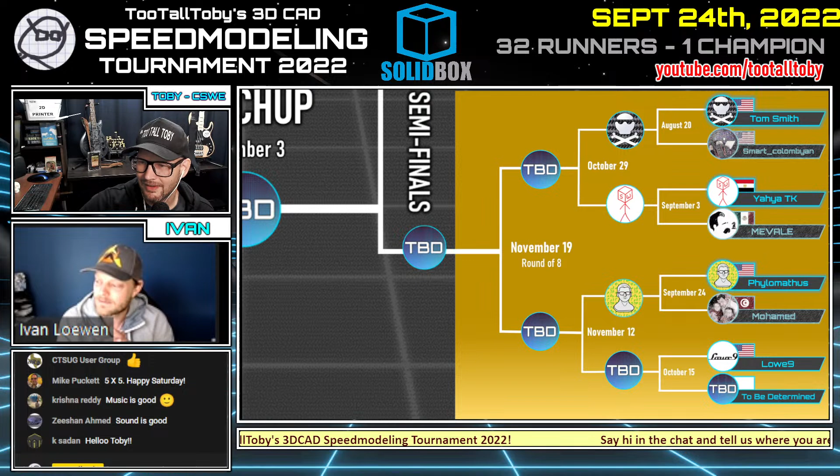So I like the bracket that you've done. Sorry to interrupt. Oh no, thank you. I like it. Yeah, it's a lot of fun to follow, and it's a good thing. I'm looking forward to seeing who I'm up against next. Yeah, this TBD guy is really running the board here, it seems like. Oh yeah, watch out for him. I guess we're going to find out next week, right?

We're going to have Jay A from the United States, looks like it's got some kind of a panther for a logo there, going up against Anti-Venom, a regular in the chat. Going to be finding out who emerges victorious, and then that person's going to go against you on November 12th. So that's going to be interesting.

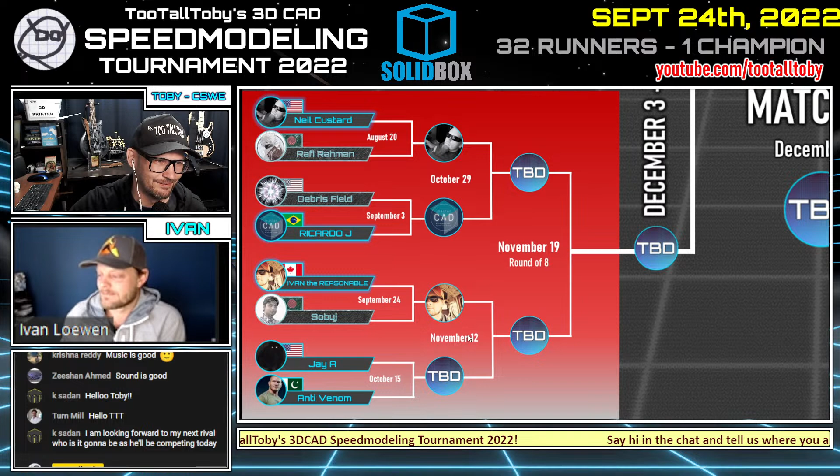Today we're going to see a special matchup where we've got Fusion 360 user Aaron from the United States going up against Gerben from the Netherlands. Gerben's an Inventor user. This actually happened a few episodes ago where we had Fusion 360 versus Inventor, and Fusion 360 emerged victorious. I believe that was Kachoo.

So now we're going to get to see another matchup of Fusion 360 versus Inventor. These matchups are done by one of my producers, and they're pretty random. So I think it's interesting, the synchronicity of having again some Autodesk on Autodesk action. It's going to be pretty cool.

And k sadan confirming in the chat, yes, it was Kachoo who made it through there, the F360 user.

We're also going to see some SolidWorks versus SolidWorks action today, with Zeeshan from Pakistan going up against WALRUS GUMBOOT from the United States. I think WALRUS GUMBOOT and Kachoo, between the two of them, should have a side competition for my favorite username in the tournament. It would definitely be neck and neck between those two. Yeah, absolutely, I concur.

And of course, Ivan the Reasonable. And then we've got Chris Smith in the chat saying, yo, what's up, Chris Smith? He was my co-commentator a few weeks ago as well while you were running.

So we had 32 runners from around the world that have signed up for the competition. We have 10 additional runners on the waiting list in case somebody's not able to make it or pulls out at the last minute, or maybe gets afraid of who they're going up against and gets sick because they're afraid of their competition. So we have 32 runners plus 10 on the waiting list.

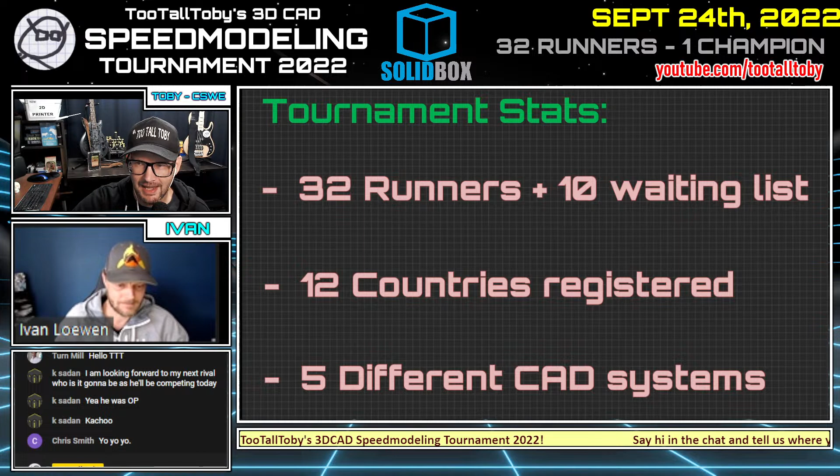We have 12 different countries that have registered for this tournament, and we have 5 different CAD systems so far, and who knows if we'll see any additional CAD systems as time goes on and we get deeper into the waiting list. So today we're going to see Aaron going against Gerben, and we're going to see WALRUS GUMBOOT going against Zeeshan.

And then next week, like we mentioned, we're going to see Jay A going against Anti-Venom, and Lowe9, good old Andrew Lowe, one of my mentors in the world of surfacing. I learned much of what I know about surfacing from Andrew and from his amazing presentations. So I'm excited to see him in action.

Going up against TBD, to be determined. I think it's going to be Zach Ass. So if you're watching out there, Zach, I think it's going to be you. We're just getting some of the logistics together. We've been on the road a lot this month, these past 3 weeks, so we're just getting some of the final confirmations together. But I think it's going to be Lowe against Zach Ass, which is another cool username.

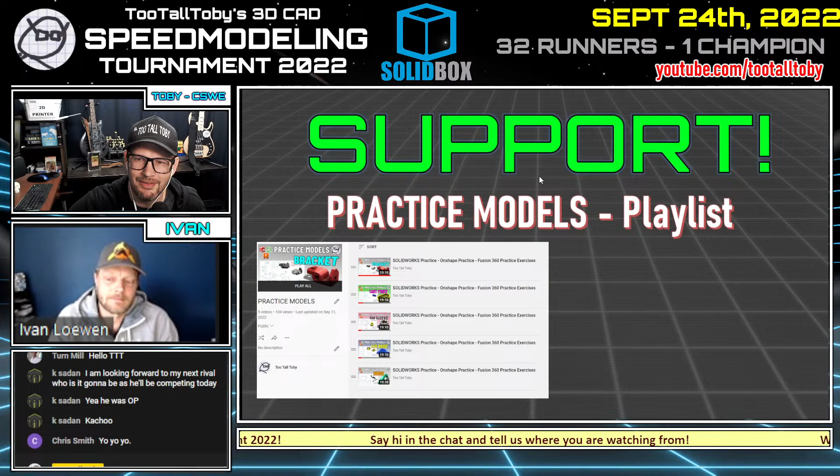Is that a foreshadow of future rounds, maybe? No, actually, it's a little bit of foreshadowing as far as complexity goes. The models themselves actually come from older episodes of Model Monday Live, where when I look back through those older models, I'm like, man, I really challenged you guys. I gave you some tough ones. Yeah, I recognize some of them. Some of those take quite a bit of time to get through to figure out what's really going on with the model.

All right, so let's talk about how this works. The way it works is that I'm going to show our competitors a 2D print, and I'm going to have them turn it into a 3D model. They're going to calculate the mass and enter that mass in the YouTube chat. So check out the YouTube chat, and we will see who is able to answer it first.

Now, the rules of this tournament are that it's going to be a best-of-3 matchup. So our runners are going to be side by side. They're going to have a little win indicator in the upper left or upper right, and once they win one match, they'll get a little green dot indicating they've won. If they win 2 matches, then they move on to the round of 16. You're allowed to get one wrong answer.

So our competitors can go into the chat, type in an incorrect answer, and I will say, I'm sorry, Tom Smith, that's incorrect. What you're going to need to do is look at your model, look at the print, and see if you missed anything. Then Tom Smith could go through and try again. If he gets it right the second time, then he's good. If he gets it wrong the second time, then it's basically up to the other person to lose. So you get one more try.

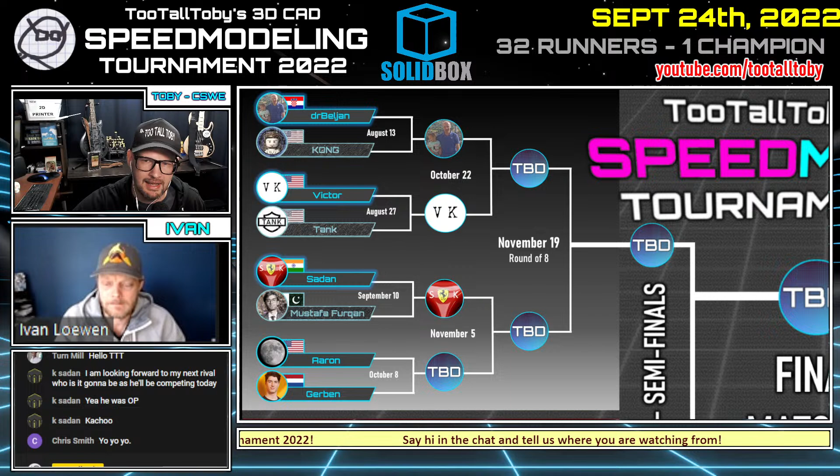I'm excited. This is the end of our round of 32 for the black bracket. So you can see here, we go down to our date today, October 8th. We got Aaron versus Gerben. This is it, this is the bottom of the black bracket. And after this, we're going to have our competitors for the round of 16 out of the black bracket.

So let's learn a little bit about our competitors here. We can see that Aaron is using Fusion 360. He's a twin, and he's still in school. And he once made a Roomba-esque robot with minimal parts. That's kind of cool, huh?

Very nice. And then we can see here that Gerben is the TooTallToby speed modeling champion from 2021.

Quite the flex there. And we see that Gerben also won first place World Skills Netherlands CAD 2020. So this guy is a speed modeling slash CAD modeling competitive professional. He's really in it for the competitions.

So this is going to be a good matchup. We're going to get a chance to see a little Fusion 360. I know a lot of people who watch this channel are more into SolidWorks, and so they're going to get a chance to see a new CAD system, or possibly two new CAD systems. I'm excited for this matchup.

So here's how it's going to go. In just a moment, I'm going to give you guys a full screen view. I'm going to give you a countdown, 3, 2, 1, and when I do, I'm going to show you the 2D print. And when I show you that print, it's going to be up to you guys to immediately start creating the model. Just give me a second, make sure I got everything in line.

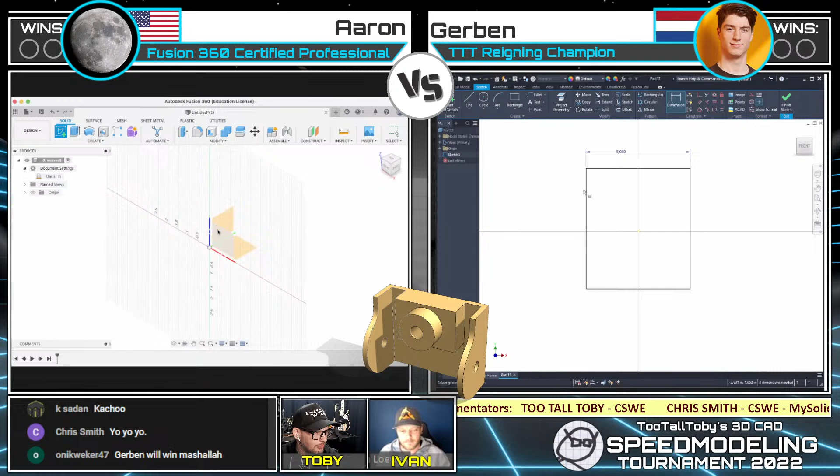Both of our competitors are already going, so I'm going to flip over to their screens so that we can see them modeling this. We've got Aaron on the left, Fusion 360 certified, Fusion 360 professional. We got Gerben on the right, reigning TTT champion.

And we can see that it looks like Gerben is starting off with kind of like the base plate type of a view here, where Aaron is starting off more with that U-shaped view. So let's see who is able to come out victorious in this thing.

We see Gerben going through, adding in his dimensions, fully defining that sketch. Dimensioning out to that point of tangency. Wow, very fast to create that side view.

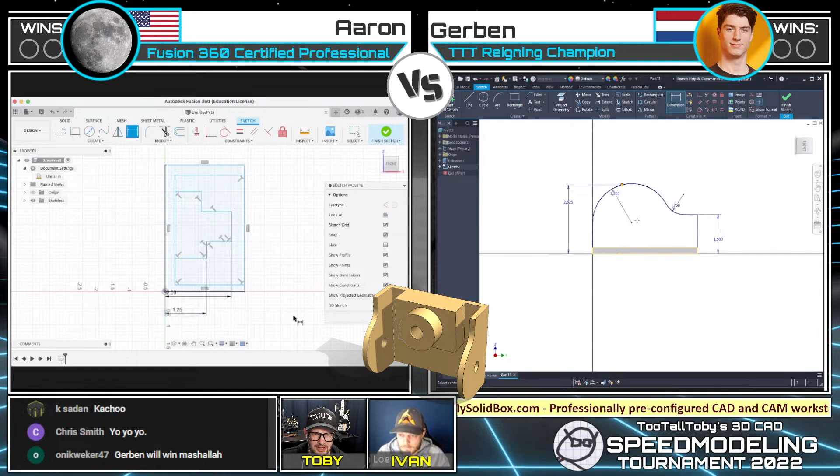That's using Inventor, standalone desktop software, where Fusion 360 users are working from more of a cloud-based format. And we see on the left there, Aaron looks like he got an error off of his sketch, and it looks like he was able to resolve that.

Looks like Gerben's going through, made a mirror of that plate on one side of his model. Was able to mirror that over pretty quickly.

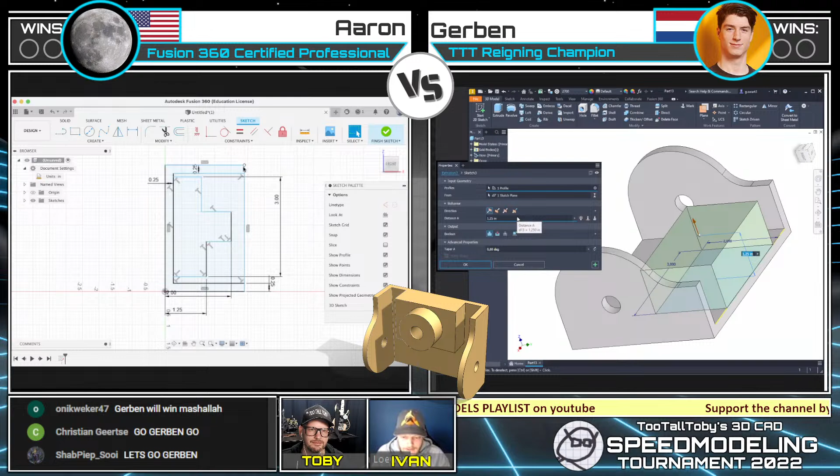Yeah, these guys are fast, and it's interesting seeing something other than SolidWorks, a few little symbols and toolbars that you're not familiar with, but the 3D model is happening regardless, and it looks like Aaron's doing contours and multiple shapes in one sketch. So there's something I'm familiar with as well.

Yeah, we saw Kachu utilize that strategy as well, and it really paid off nicely for him. And we see Gerben, man, just flying through this model.

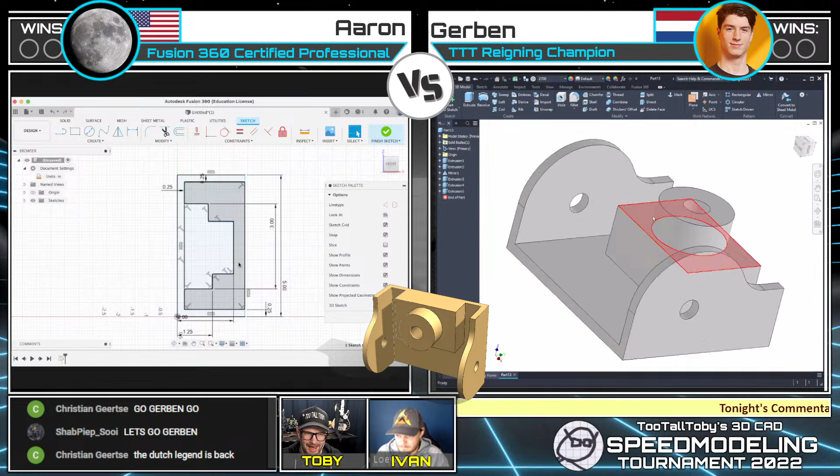I see in the chat we got some people cheering for him. Gerben, go, Gerben, go. We got people saying, let's go, Gerben. So, and he's really moving through this model quickly.

And he is. And, you know, I think that's what we would expect from the reigning TTT champion, but I didn't quite expect him to move through that quick. I mean, wow, this is impressive for sure. Yeah, no question. Yeah.

So it looks like Gerben has come in with an answer, and looks like he's come in. I'm just trying to double check the answer that I'm seeing there. One point. Hold on, stand by one second, Gerben.

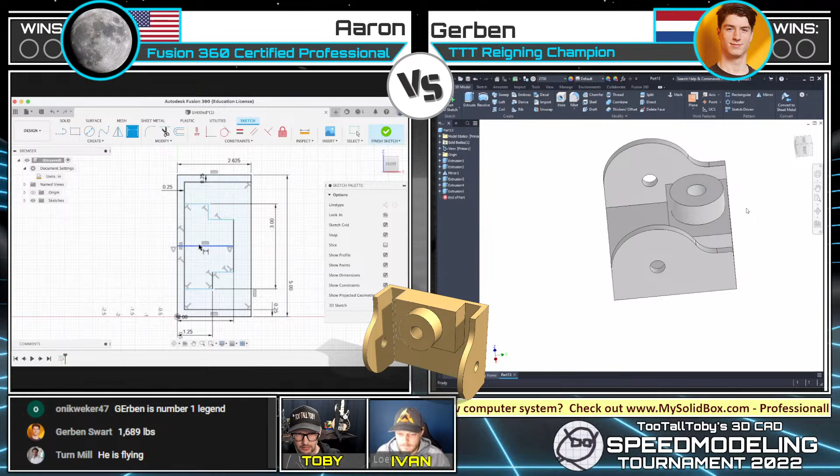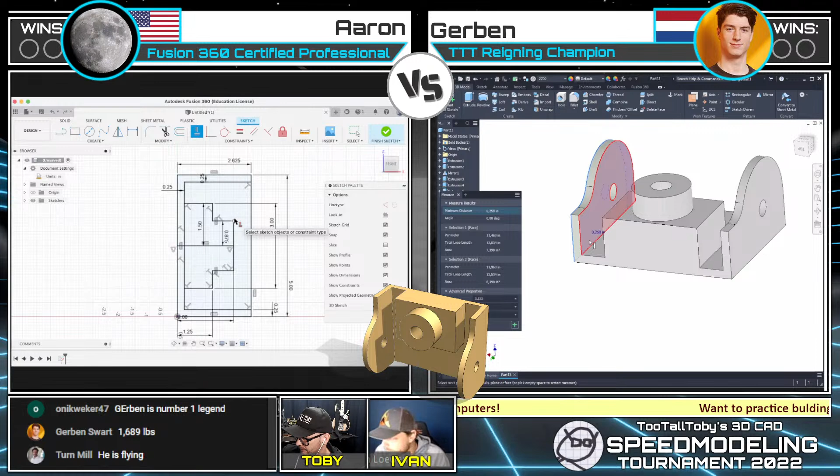Gerben came in with 1.689 pounds, and that is not correct. It looks like Gerben might have either a missing dimension, incorrect dimension, or possibly a material property issue. I didn't actually notice, he was moving so fast I couldn't see what was going on. But something is off with his mass properties or the resultant weight. We're going to let him try to figure it out.

Yeah, I've got an idea of what it is, but I'll let him figure it out. Okay, good. All right, well I'm glad that you're confirming. I always worry in these things that maybe I've done something wrong on the admin side.

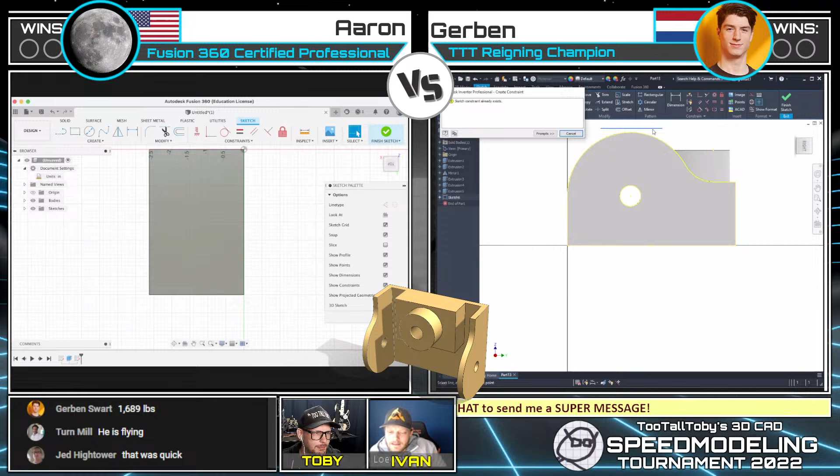Thank you for putting my mind at ease a little bit there, Ivan. No worries. So we can see on the left, this opens up the door for Aaron to go through and continue with his strategy of creating the contours in his model.

We see Turnmill in the chat say he is flying, and Jed Hightower say that was quick, that was very fast. You know what I'm going to do after the stream is over? I'm going to replay it and try to model this part as well, just to see how I stack up.

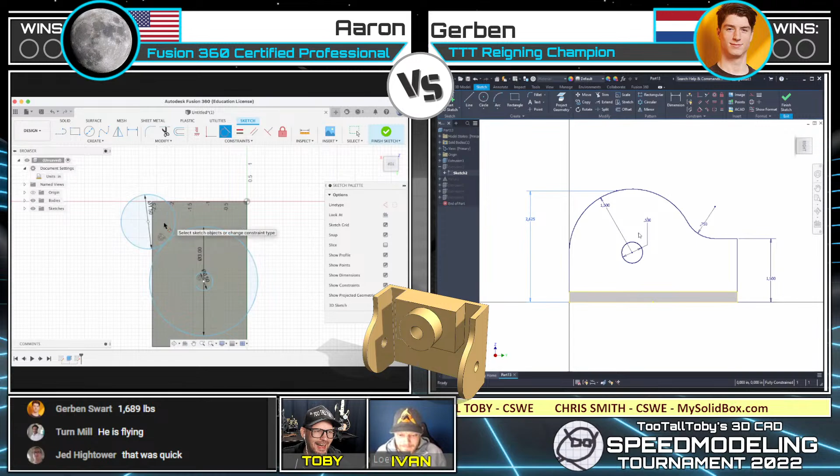Wow, that's you putting in the reps, getting in the gym there a little bit. Yeah, that's what you got to do sometimes in the World Series of CAD Modeling Championship. Practice pays off, but when you're in the matchup you're thinking speed, so you don't always look at the entire drawing, and it's pretty easy to miss a dimension. I've done that, I know from experience.

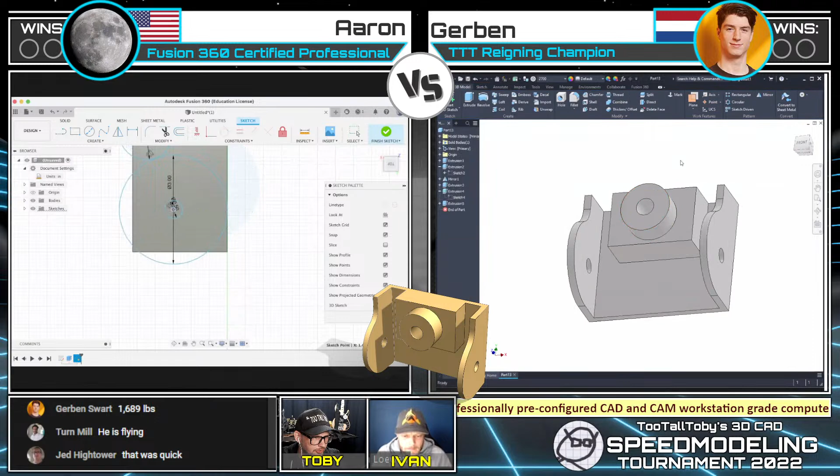It looks like on the left we've got Aaron going through creating some of the arcs for that side plate, trying to get those arcs into the correct location using some tangency constraints and different diameters and radii. It's pretty slick the way Fusion 360 is able to get in there and add those constraints.

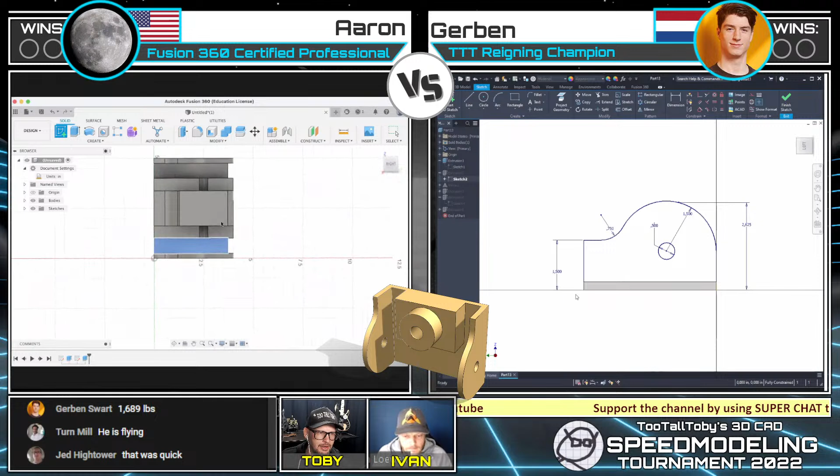Yep, it's looking good. This is one thing about Fusion 360 that I always thought was really cool, is that you're able to utilize the edges of the model as contours. I know you can do that in later builds of SolidWorks, but it wasn't there right from the start, so not too many people are familiar with how to use it efficiently. I think what he did there was good.

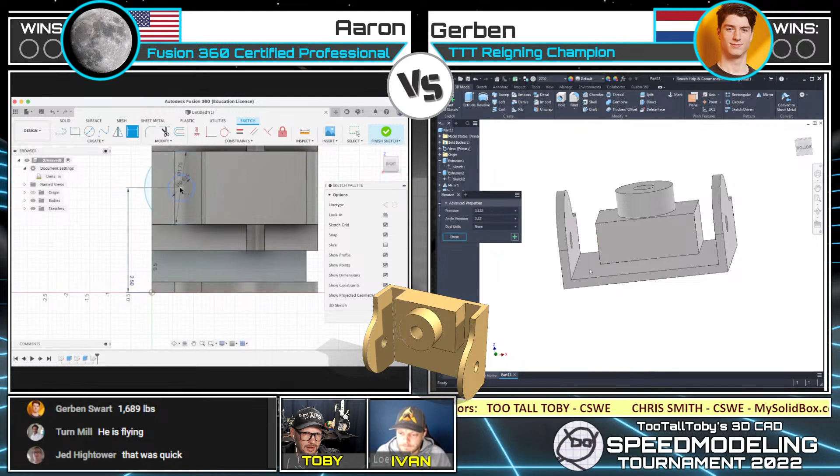We see on the right Gerben going through, can't seem to figure out what is off about this design, trying to figure it out, double checking his dimensions, double checking the original drawing, just trying to figure out what's going on here.

Yeah, I've been there, man. It's so familiar. Yeah, I know what he's feeling right now.

It's always cool to see the different approaches of two different people. Sometimes they end up doing the same thing, and sometimes they come at it from two different perspectives.

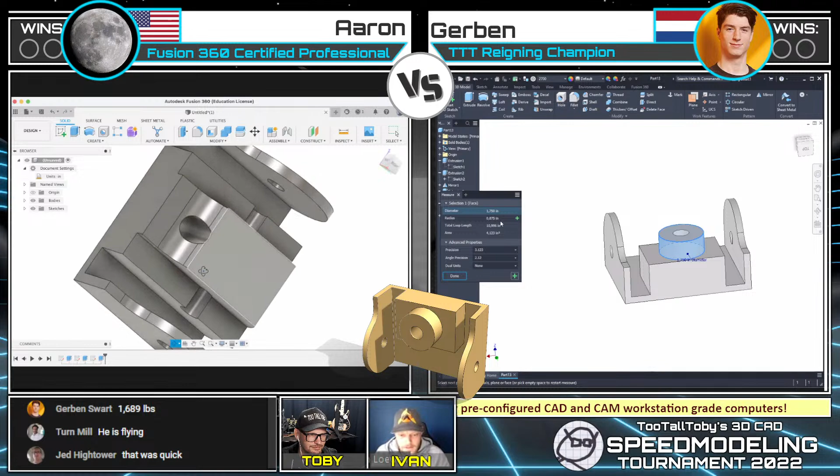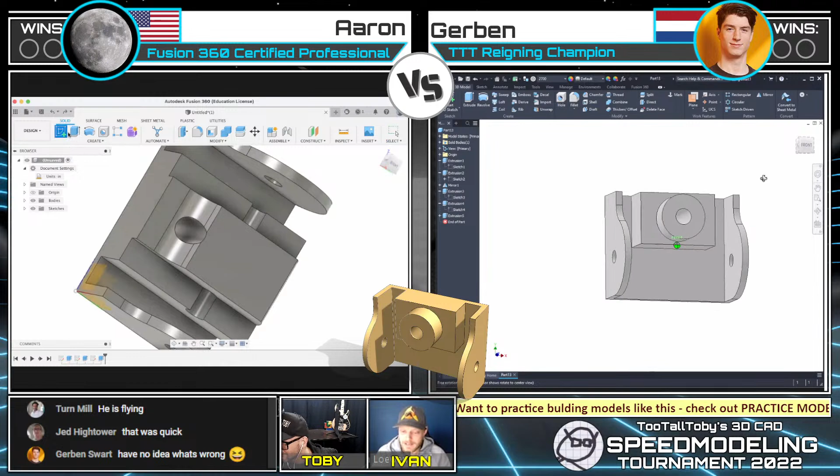I know there's using contours in SolidWorks. I think I saw a lot more guys using it in your tournament, and in the past I very rarely used it, wasn't my habit. It's interesting though, because you don't have to refine your sketch as much, you don't have to trim everything up nice and pretty, you can just lay it all down. It's a good thing to be familiar with because you can reuse it later for different parts or features using the same sketch. I don't mind it, it just wasn't one of my habits to use it.

I completely agree with you. I was also not a big fan, or not something I used regularly in my arsenal, the different contours. Since the tournament, and since seeing other people using it, I found myself starting to use it a little more in my actual hourly work, as an experimentation, but definitely influenced by the people using it effectively in the tournament. I was like, maybe there is something there.

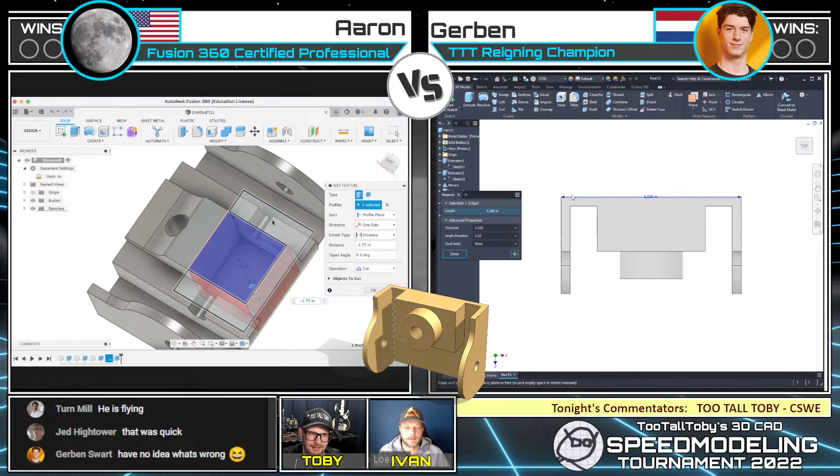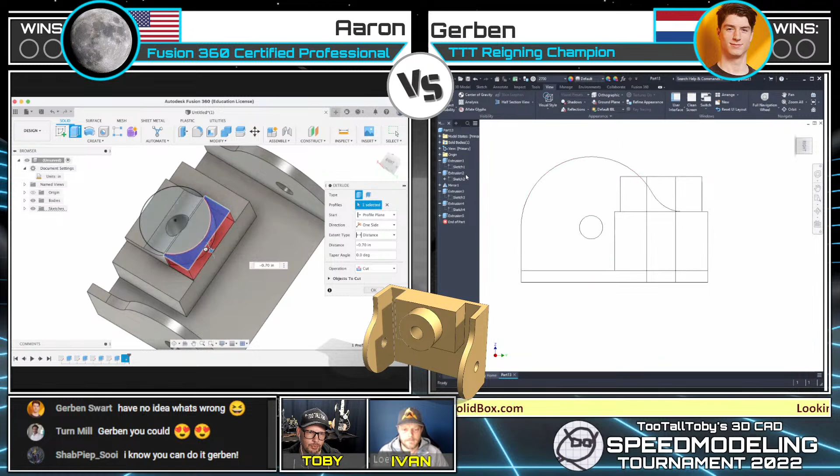Is there a downside to using it, do you think? What would be a downside? I don't know, maybe you could make the argument that it makes the tree a little bit harder to decipher if somebody else is looking at your work. That's kind of the only downside I could really think of. I can't really think of anything beyond that.

Gerben was just saying he has no idea what's wrong. Man, I feel for you.

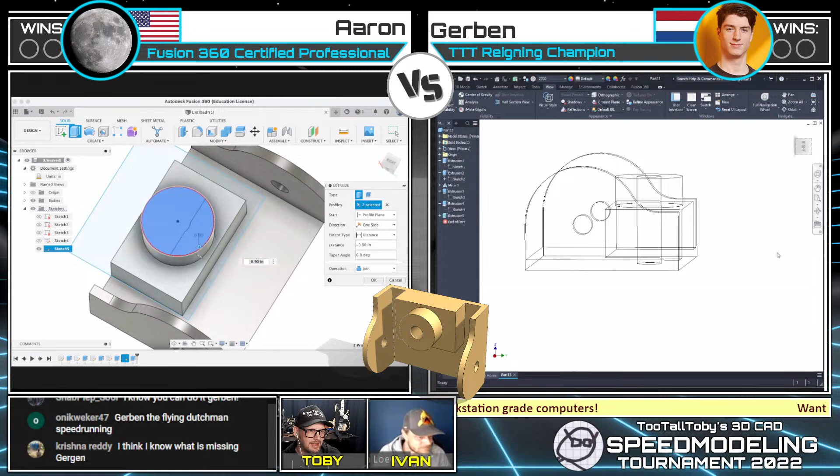I'm pretty sure I know what happened. Well, we'll give him a few more minutes here, and like I said before, this maybe is the opening that Aaron needed. That's right. Aaron's getting through this model and creating the geometry that he saw on the print, and so we've got both of our runners going through this thing and trying to sort it out.

Sometimes these models look like they're so easy. It's like, it's just going to be a few features, I'm just going to blast through it, and then it turns out that maybe they weren't quite so easy.

I saw Gerben just made a change. Yep, I see Gerben made a change. Entering in the revised mass there of 1.550.

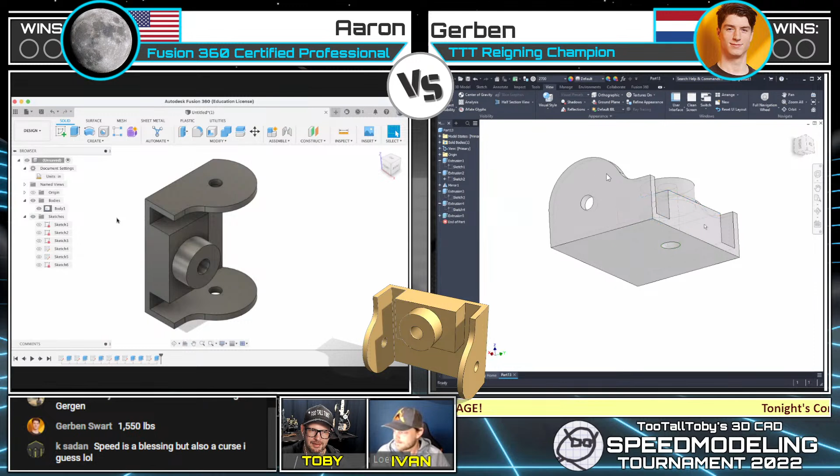Unfortunately, that's also not correct. Not correct within spec. So for Gerben, that's going to be a double timeout there. Yeah, and we're gonna let this one ride for Aaron. I'm gonna throw a timer on for Aaron and see if he can finish this in the next 5 minutes. But it's up to Aaron now to figure this out, figure out if he can come up with the correct mass.

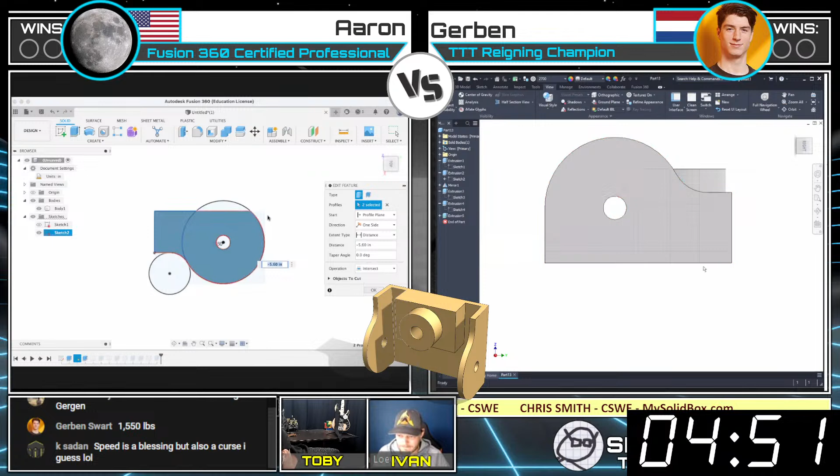Double checking my notes here, making sure that when the world champion, the reigning TooTallToby world champion, has the mass coming in incorrectly, I always have to wonder maybe if I did something wrong.

Question here from Krishna: can we flash the drawing on the screen? Sure thing. You could also roll back in the YouTube video, but I'm happy to accommodate here. So let me just flip over to the drawing here just for a moment. Leave that up there for about 3 seconds.

I know that Aaron is going through trying to come up with the correct mass here. To go back here, I saw Aaron going through and applying the material. That was pretty cool.

And so he's going to now try to see if he can come up with the correct mass and enter that in the chat. We see Gerben on the right still going through the model, saying, what in the heck is going on? What did I miss? How could this be off?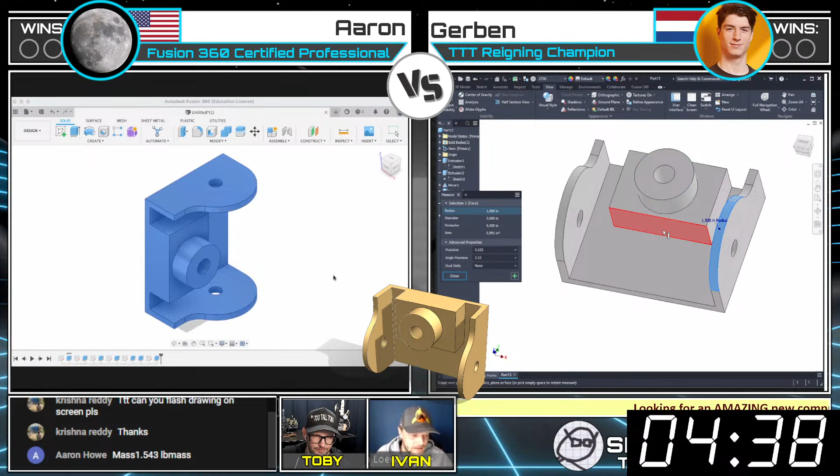Yeah, I've done that as well. I've had a matchup where I entered 2 incorrect ones.

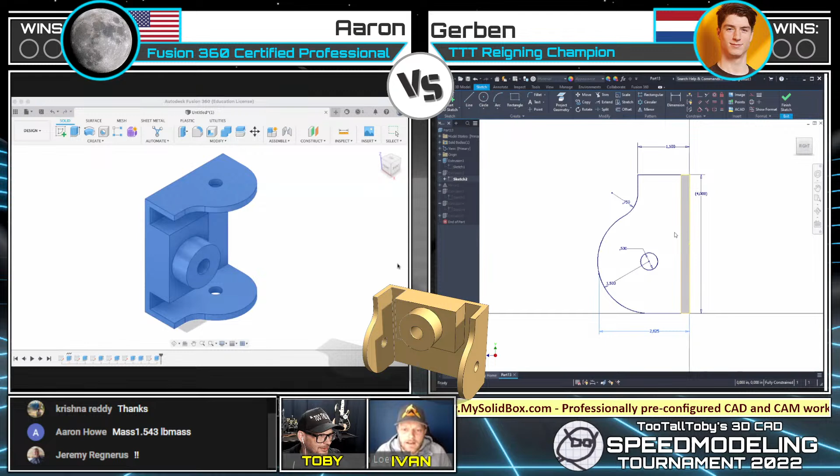And Aaron has entered the mass of 1.543, which is correct, and exactly what I got as well, 1.543. Good job, Aaron. Yes, nicely done, Aaron. So that's going to give Aaron the first win here. You're going to have to get 2 wins, but very nicely done.

GG to Gerben, GG to Aaron. And wow, what a cool matchup, man. That was exciting. Yeah, I mean, we saw Gerben there just blast through that thing like it was going to be no problem at all. But sometimes there's little things that can hang you up a little bit, and we're going to have to figure out what exactly is going on with that model.

And as always, Gerben, if you ever want to send me a copy of that model, in like an IGES or STEP format, I'd be happy to look at it too and see if I can't figure out what was going on. What did you pick up on it, Ivan? You said you thought you maybe noticed what was off on his. Do you want to share what it was, or do you want to keep that?

Yeah, that's fine. The first change he made is the one that I caught. So the rectangular boss, kind of in the middle, where the round one is sitting on, the height of that was incorrect. He had it flush with the height of one of the edges on the outside, but you can just see on the drawing that there's a step, a little different step. It's only 1 1/4 high. So I saw he made that change.

And that's the only thing I caught. And then after that, it was still incorrect. So at that point, I'm not sure what the reasoning was. Yeah, I'm not sure what it was either. He also, when he changed that, it got very close to the correct mass. So I don't know if maybe there's like a slight discrepancy in the volume, in the density, or material density. What was going on there?

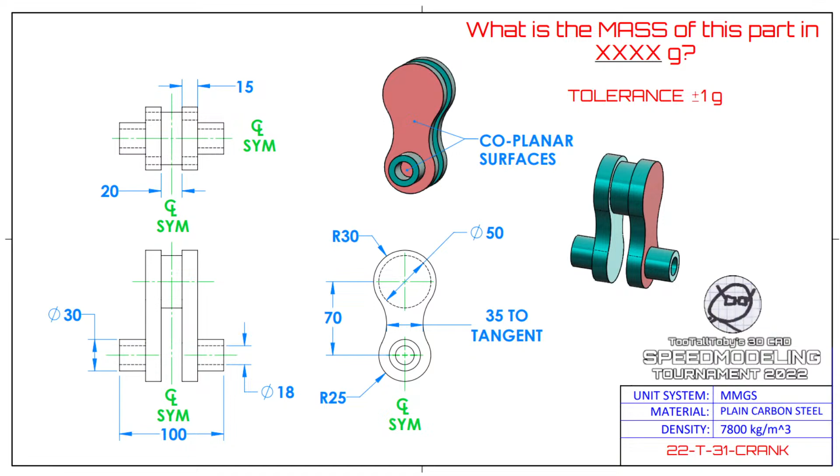Let's flip over to the CAD versus CAD screen. We got Aaron on the left using Fusion 360, and Gerben on the right using Inventor. Maybe Gerben's confidence is a little shaken after that last defeat, but we're going to see - this is where champions are truly made, in the face of defeat. Can he bounce back? Can he maintain his composure?

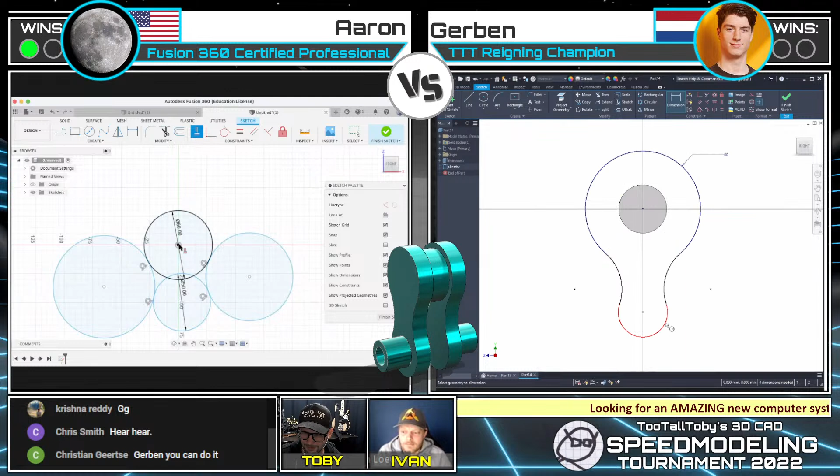Looks like he's flying through, creating the border of that crank. Yeah, he's quick, there's no doubt about it. And there's a lot of similar-esque profiles in this part.

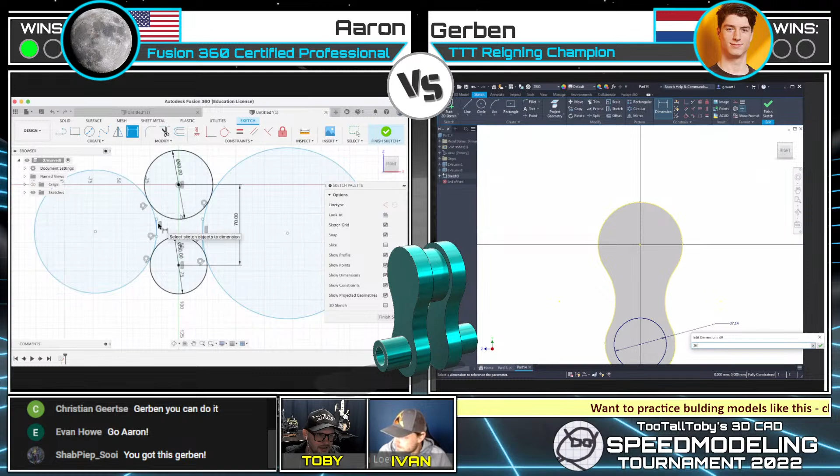And we got Aaron on the left making a bunch of circles, utilizing again what we've been talking about, the Fusion 360 ability to do contour selection, easily creating the required geometry. So he's getting in there, looks like using some sketch relationships, making those lines tangent, so he can get that tangent to tangent dimension going across.

We see Gerben on the right, looks like he's going to be using a mirroring strategy - probably do half the model and then just mirror it across the center line.

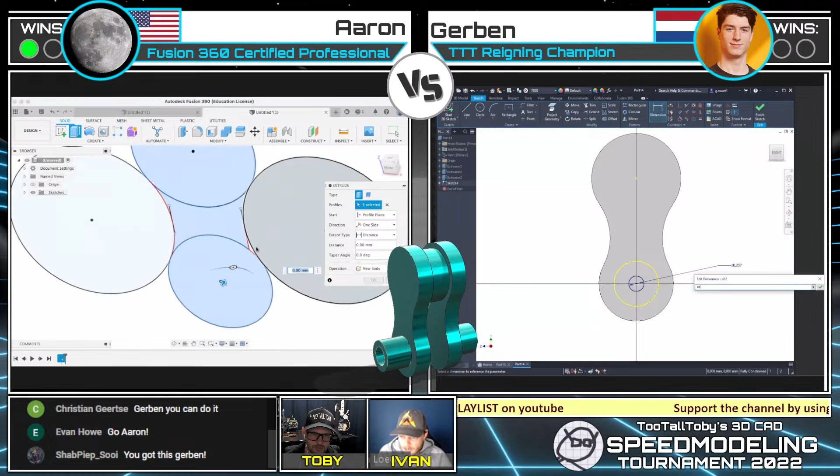I wonder what those red edges are. Maybe that's just the edge select that are highlighted. On Aaron's screen? Well, I was seeing it on Gerben's. Now it's on Aaron's sketch as well. So yeah, on both - maybe that's just a highlight color.

Wow, that was like less than 2 minutes. Gerben was able to go through and create that crank. Now let's see, now we're gonna find out if he can come up with the correct mass for that crank.

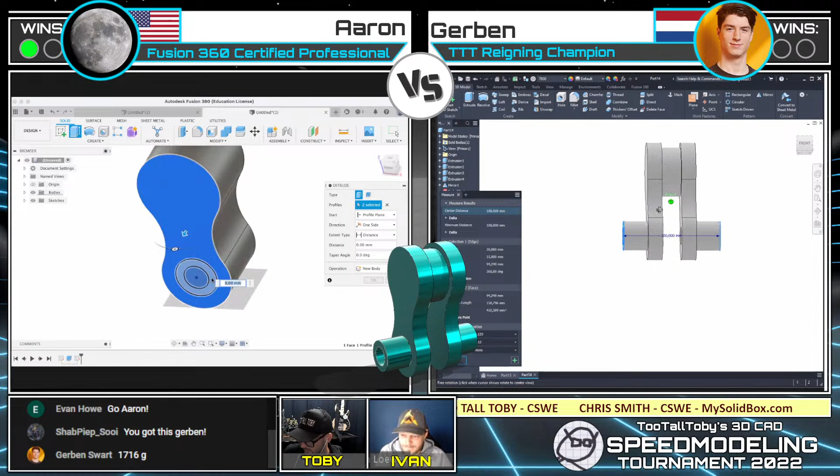And it looks like he entered in a mass of 1716 grams - that is incorrect. So looks like he came up with a mass of 1716, that is incorrect. So he's gonna take a look at his print real quick here.

That's gonna potentially open the door for Aaron, who looks like he's taking a similar approach of modeling half, and he's gonna try to figure out how to get the remaining geometry that he needs from this thing. Very interesting.

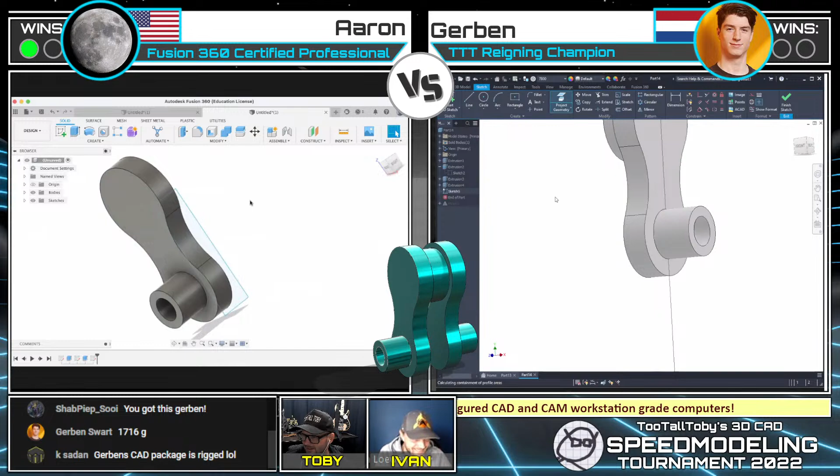K Sadan says Gerben's CAD package is rigged - he thinks maybe somebody got in and messed with his densities or something. Very interesting on this one.

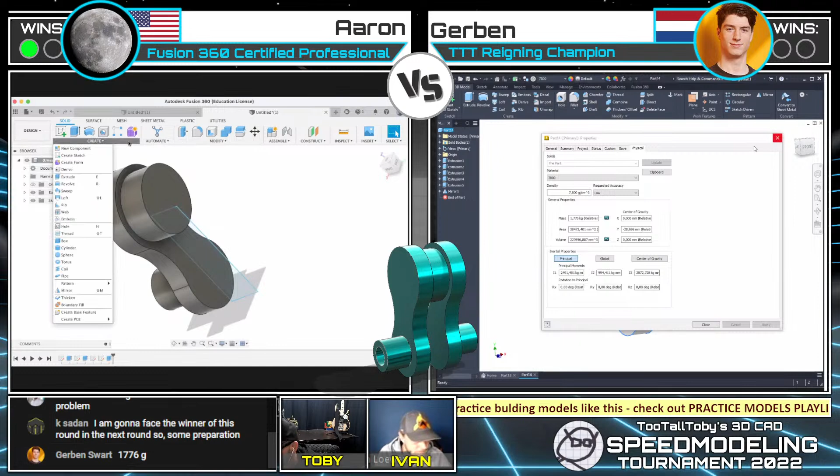Yeah, I can see a little tweak Gerben made there. He's got the speed, but yep, he's got the speed, the little double check it, the little details. And looking at the chat, I see Gerben came in with 1776 grams.

And that is correct. So good game to Gerben, good game to Aaron. 1716 was incorrect. He was able to go through, refine his geometry, take a look at the model, and Gerben was able to come through and come up with the correct answer. So nice job, Gerben, let's go. And nice job, Aaron as well.

Look, Aaron's got basically one more feature - the mirror - and then he's right there. Yeah, he was right there, neck and neck. So that is absolutely awesome. Nice job, Gerben, nice job, Aaron.

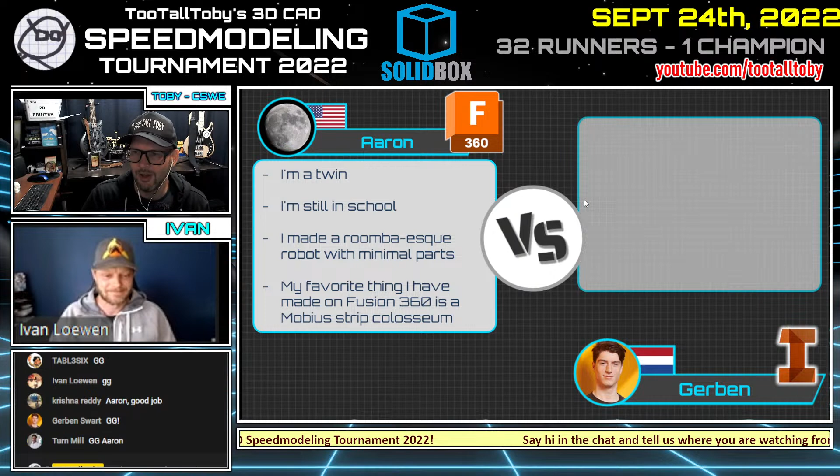Looks like we're going to go to sudden death, the third matchup. So that's what I like to see, that's the best. So what do you think about these fun facts about these runners today? Any thoughts on these, Ivan?

I don't know if Aaron's in high school or college, but a lot of these guys make me feel old. I've got friends a bit younger than me who do a lot more gaming, and I'm like, this esports, this speed modeling, this is gaming in your 40s, right? Maybe for us, but some of these younger guys are gaming on the same platform in their 20s, maybe even their teens. I had some really young guys in my most recent user group meeting too, and it's really awesome to see them getting excited about this.

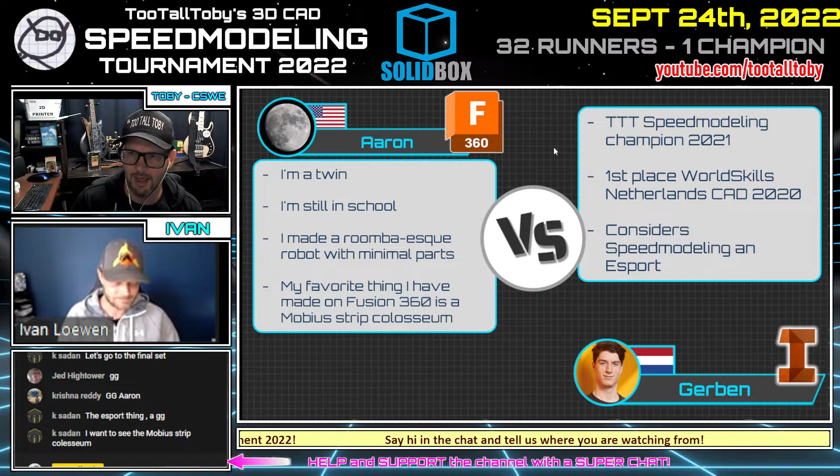Very cool, all right. Aaron, good luck on this last one. Gerben, good luck on this last one. Let's take a look here - I'm going to flip over to full screen, and I'll show you guys this final part if you want to get ready to create a new model.

Here we go, in 3, 2, 1, go. What is the mass of this part in grams? Tolerance plus or minus 1 gram. This is a millimeter part using the material ABS with a density of 1020 kilograms per cubic meter.

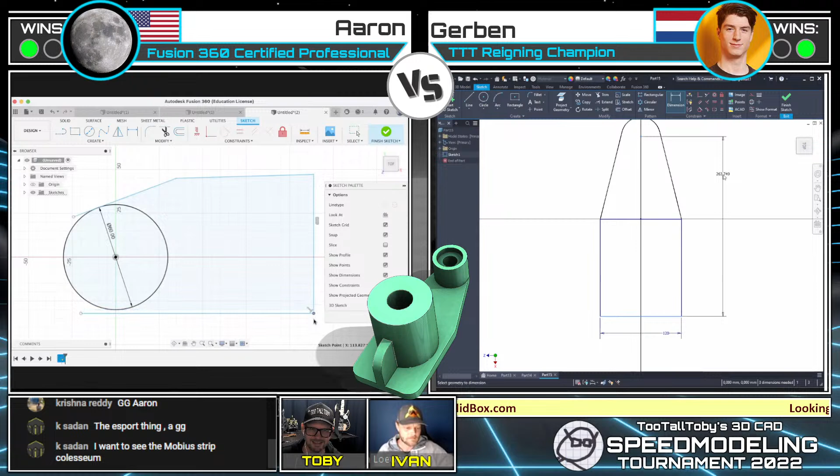Both of our runners are into it here. Let me flip over to the CAD versus CAD screen so we can see what they're doing with this model. Wow, Gerben just got that on there so quickly - did you have like a pre-created block of that exact shape somehow? That's just insanely quick.

Yeah, that was impressive. And we see Aaron over on the left, right behind him, neck and neck, creating that same kind of shape - it almost looks like an ironing board.

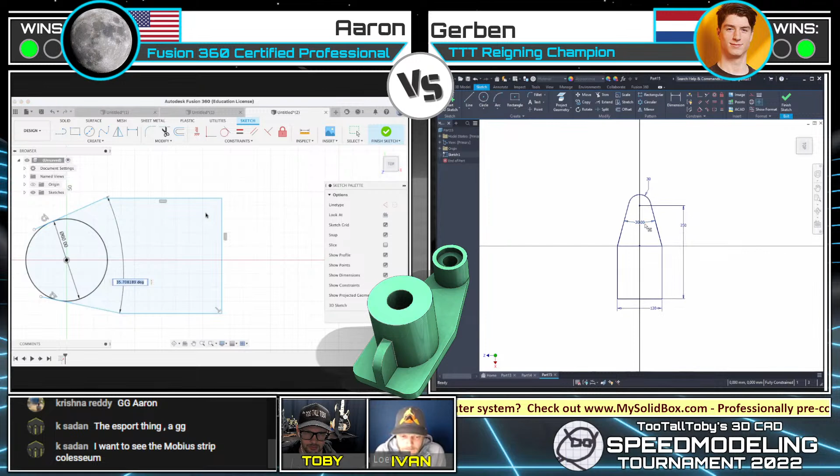I'm going to just turn on this light real quick, Ivan. Slightly different quality of brightness on that light.

All right, and we see both of our runners taking the same approach. Whenever you start a new model, you've got to decide what your starting plane, your starting profile is going to be, and it looks like they both started with that kind of ironing board profile.

It looked like Gerben was able to use some basic arithmetic there in the dialog box - looks like he typed in the height minus the thickness of the base plate. That's something I do a lot as well.

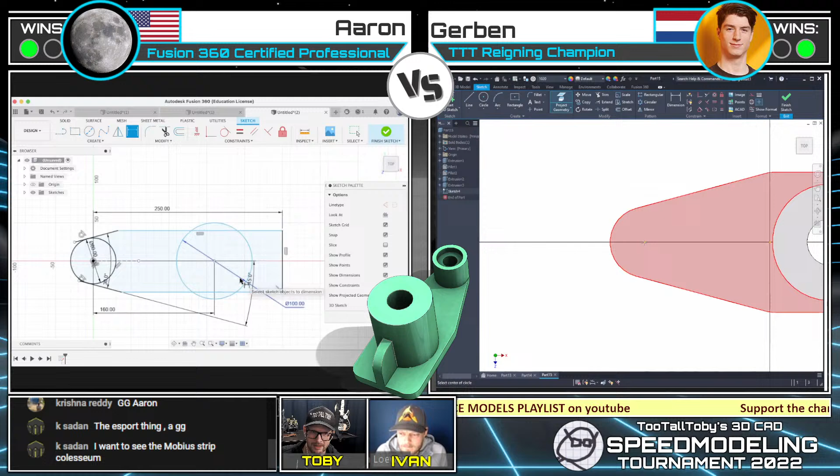Yeah, absolutely. I see a feature on this model that's kind of embarrassing for me to say, but up until just recently it's a feature I've never used very much. I'll say what it is because you can see it on the back end of one of the cylinders - there's a rib sticking out, and there's a few different ways to model that. It's kind of surprising how many times it's given me a little bit of trouble, depending on where it's located.

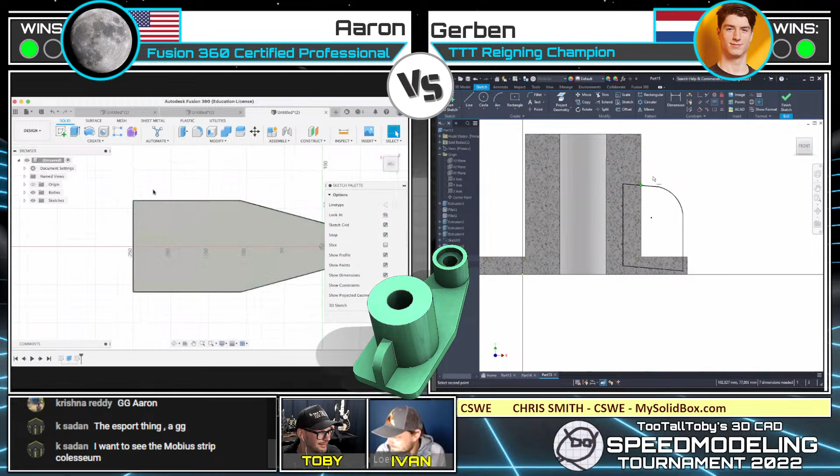Yeah, I know that when it comes to those kinds of features where you can make it a few different ways, I think sometimes those are the most difficult in a contest like this - you get kind of paralysis by analysis.

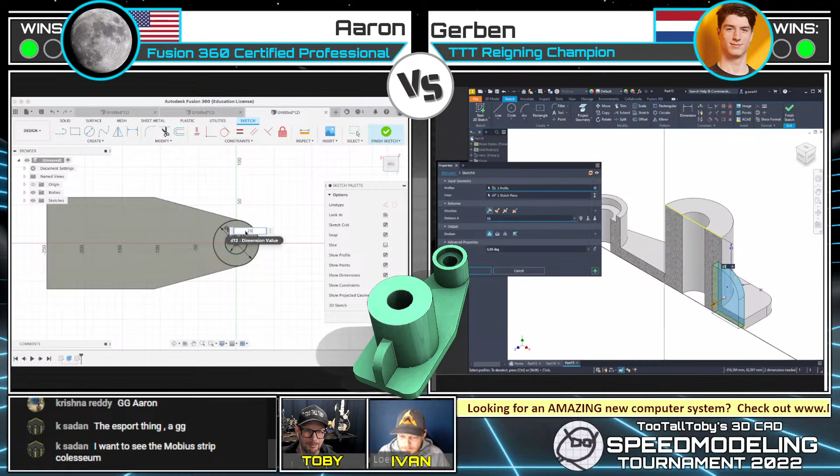Totally. There was a little bit of an element of this that made me think about you, because when it comes to that cylindrical boss sticking up, I thought, oh, you could just locate that anywhere, right? Yes, the old Ivan exploit. But then the way that rear feature, that fin or rib, is created, you really can't just model it anywhere. So that was a little nod to you - I knew you were going to be the co-commentator on this one.

All right, cool. So Gerben comes into the chat here after creating that model with an answer of 1243 grams, and that is correct.

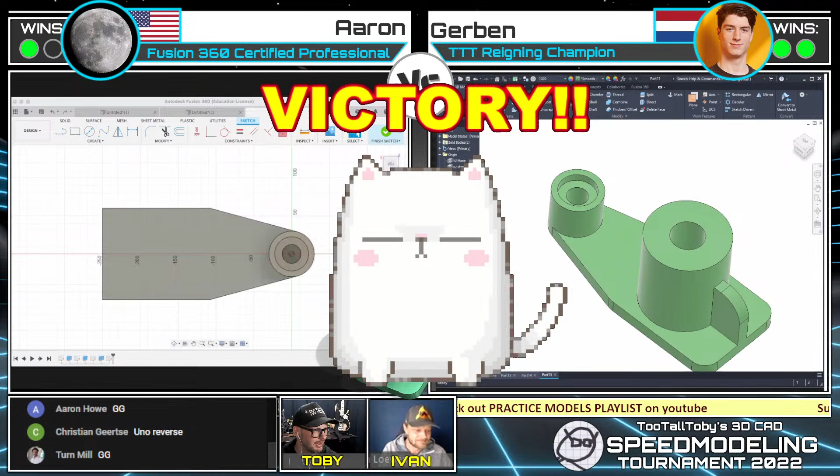So good job. Down from 1-0, and he made the comeback. He held it together. Congratulations to Gerben, and congratulations to Aaron as well. Gerben's going to get the victory cat there. If you guys in the chat could give Gerben a GG, and really give both of our runners a GG, they both did awesome. That's going to allow Gerben to move on to the round of 16. Aaron, thank you so much for joining us for this tournament, it was awesome having you. Hopefully we'll see you next year in the 2023 tournament. But GG to both of our runners.

What do you think about that matchup, Ivan? That was great, man, that was quick. I'm glad Gerben got it their first try. No complaints, that was well done, pretty intense. Sometimes when you lose a match, it can leave you feeling a little rattled, and I think that's when you really got to just pull it together, calm down, and say okay, it's all right, one down, that's all right. It's best of 3, and we can definitely come back and make it happen on these subsequent rounds. Good for Aaron for keeping going on that first one too, because he had the chance there and he made it. Aaron just said, all right, this is my opening, let's go. I love it. Great matchup from both of our competitors.

I see our next 2 competitors, Zeeshan and WALRUS GUMBOOT, are getting themselves ready here. I'm excited to see what these guys bring. Looks like it's going to be some SolidWorks versus SolidWorks action on this one. Let's go, let's see what we got.

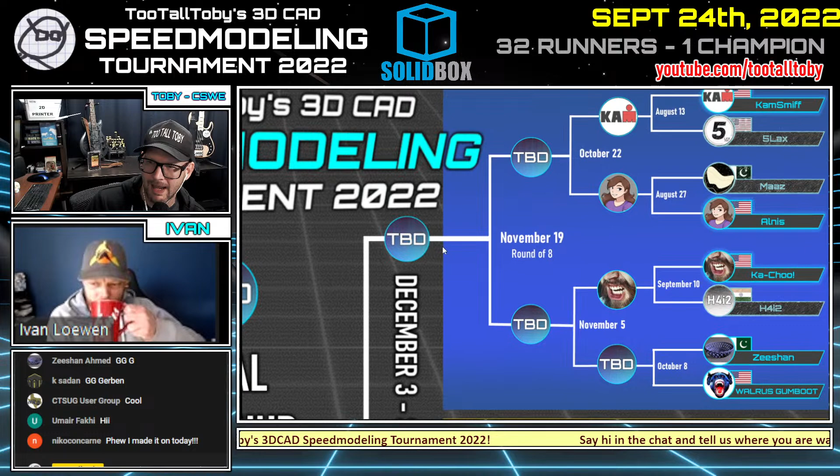So let's take a look now at the blue bracket. Over in the blue bracket, our final matchup is none other than Zeeshan from Pakistan going up against WALRUS GUMBOOT from the United States.

Do you have a side contest going on, best gamer tag user ID? Yeah, you got the name, and then you also have the icon. It's hard to decide which one I like more. The modeling is going to just be bonus on this matchup. Yeah, for sure, I mean you gotta love Ka-Choo also, there's something about that icon that just really gets your attention.

All right, so I like it. We got Zeeshan from Pakistan going up against WALRUS GUMBOOT, and Zeeshan has been using SolidWorks since 2010, wow, that's a long time, and did all the CAD modeling by himself, learned it all by himself. Well, hopefully some of these tips and tricks along the way in the TooTallToby YouTube channel have helped as well. WALRUS GUMBOOT has 11 years under his belt, so he's also right around that same time, 2010, 2011. Enjoys spending time with his wife and family when they can get together. Yes, that is a noble way to spend your time, and definitely one I think Ivan and I could get on board with.

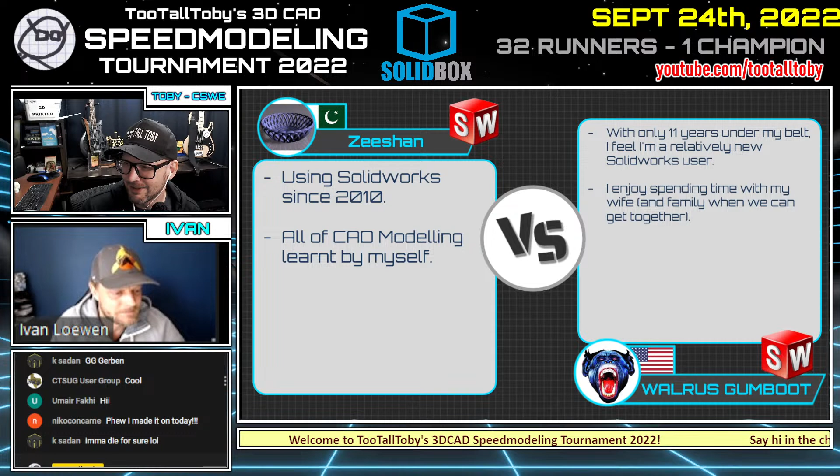Alrighty, our runners know how this goes. I'm going to show you a 2D print, and you are going to attempt to turn it into a 3D model. Let me flip over to full screen here, and let's get this challenge going. So Zeeshan, WALRUS GUMBOOT, hope you guys are ready to take a screen capture. As soon as you begin modeling, I will flip over and show your screens to everybody on YouTube. Here we go, in 3, 2, 1, go. What is the mass of this part in XX.x grams? This part is called dual plate. It's got a tolerance of plus or minus 0.2 grams, and it is made out of 1060 alloy with a density of 2,700 kilograms per cubic meter.

Right now our runners are grabbing a screen capture of this print, and they are going to begin modeling. I see WALRUS GUMBOOT has already started modeling, making his first sketch. Zeeshan is still grabbing the 2D print and going to begin modeling here in just a moment. Be sure to grab that 2D print, Zeeshan, and you can jump in and start modeling.

Hopefully we didn't lose him. I still see his screen, but I'm not seeing any action. So Zeeshan, let's get you in there.

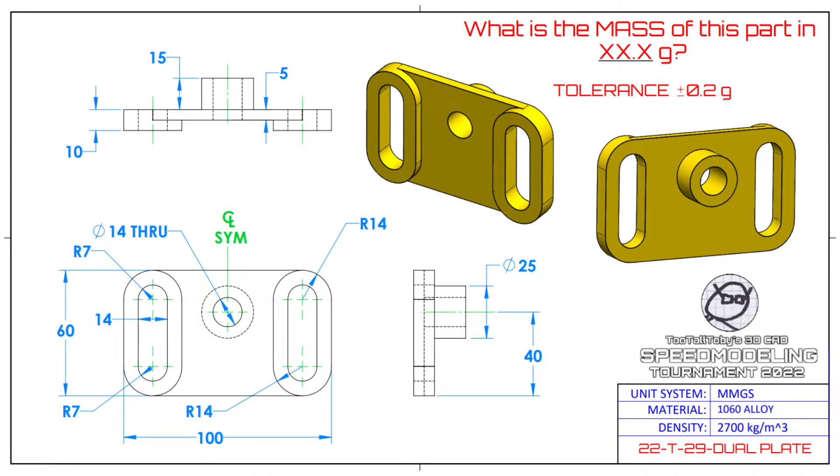And I'm going to flip over. I'm not sure what's going on. Zeeshan, I'm not seeing Zeeshan in here. But I'm going to flip over so that you guys can at least see what's going on with WALRUS GUMBOOT. Looks like he's rocking the dark theme there to create this model. Hopefully Zeeshan will come back here in a moment, and we'll be able to see some action from Zeeshan. But I'm not sure if he lost connection or if he had to step out or what's happening. I'm not seeing anything in the chat or anything from him. So we'll just have to hope that he's able to get back in here and start creating this model.

But WALRUS GUMBOOT is going for it. What do you think about this modeling approach here, Ivan? Yeah, it's good. Oh, I think Zeeshan's just starting up there. Yep, but he might have been studying the drawing, which I like to do too for a little bit. Look at the drawing and come up with a strategy, but you don't want to do it too long, right? You want to get right into it. Yeah, no, starting off with the slot shape, nothing wrong with that.

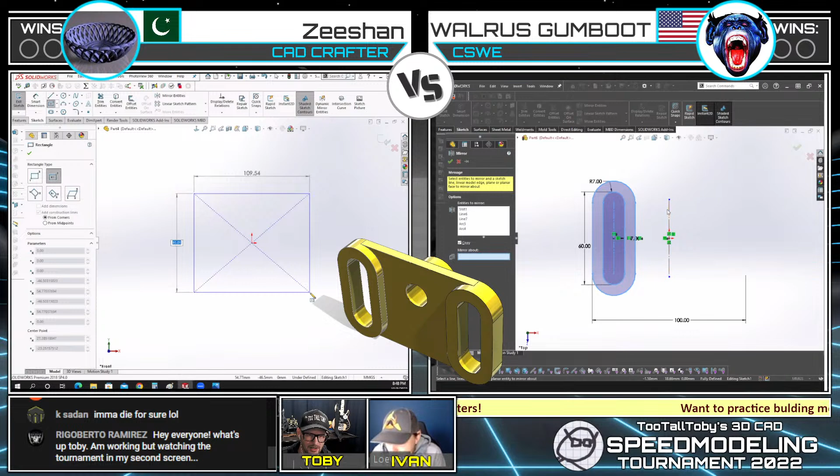Looks like he might be mirroring it in the sketch. Possibly, or maybe using it for dimensions. Yeah, using that double dimension at the sketch. Yep. Oh, okay, and oh wow, we were both right. Nice, yeah. And I see Zeeshan is taking more of the footprint approach, trying to look and see what the thing would look like if it was laying on a table and getting that geometry in place, which I always like that strategy as well. So both of our competitors using solid strategies here.

Yep, nothing wrong with that. Yep. So it looks like Zeeshan on the left is using SolidWorks 2018, and WALRUS GUMBOOT on the right using SolidWorks 2020. That's a version I use as well. I feel like that version actually gives me even better performance than the newer versions, believe it or not. Done a little bit of research on this topic, so very happy with the 2020 build, and that's where I'm staying for the foreseeable future. How about you, Ivan? What are you rocking?

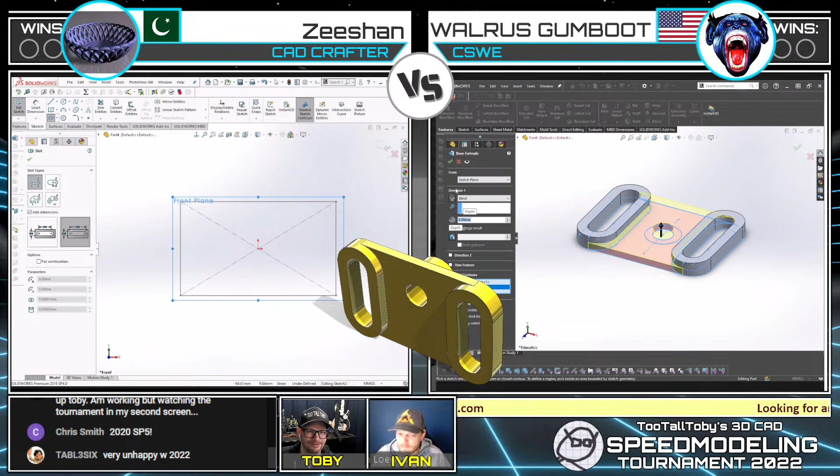You know, good point. I've got 20 and 22 on my machine right now, so I'm kind of balancing them. Used 2020 for a long time, and it's been solid. It really has. I like a few of the features in 22 as well. There's always some stuff that's cool, but yeah, I had a few little hiccups maybe, but I don't know which one I'm going to stick with. So I'm using both right now. Okay, fair enough. Yeah, looks like Chris Smith in the chat says 2020 SP5.

TABL3SIX says very unhappy with 2022. K Sadan says 2020 SP3, 2022 is best actually. It performs as fast. Okay.

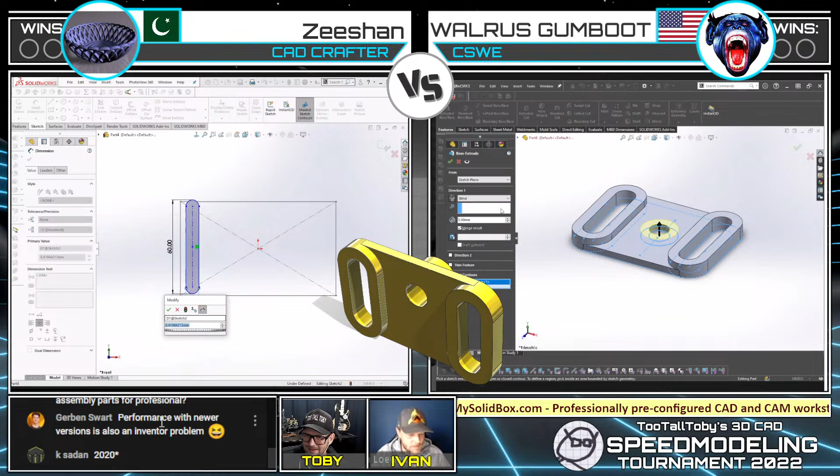Muhd Yusuff asks, is this kind of practice better than doing a complete machine assembly parts for professional? Let's see here. Performance of newer version is also an inventor problem from Gerben. We'll take a look at that question in just a little bit, Muhd, and we'll see if we can give you a good answer to that.

K Sadan says 2020. Steve CTSUG says 2021 SP3.

And while I was answering those questions, I see that this is interesting. So it looks like Walrus Gumboot is going for it with an answer, and kind of double checking, looking over his model, making sure that he's got all the appropriate information that he was expecting to see. And looks like he came in, that's Jed Hightower, mass equals 117.5. That is incorrect. That is not correct.

So the race is still on, still open to Zeeshan to try to figure out what's going on. And for Jed Hightower, for Walrus Gumboot, it's going to be a matter of going back through, looking at the print, looking at the model, trying to figure out what's going wrong. I mean, I can definitely see just geometrically, if you look at the rendering of the model that we've got in gold on the overlay compared to his actual model that was on screen, there's obviously something there that's different, right?

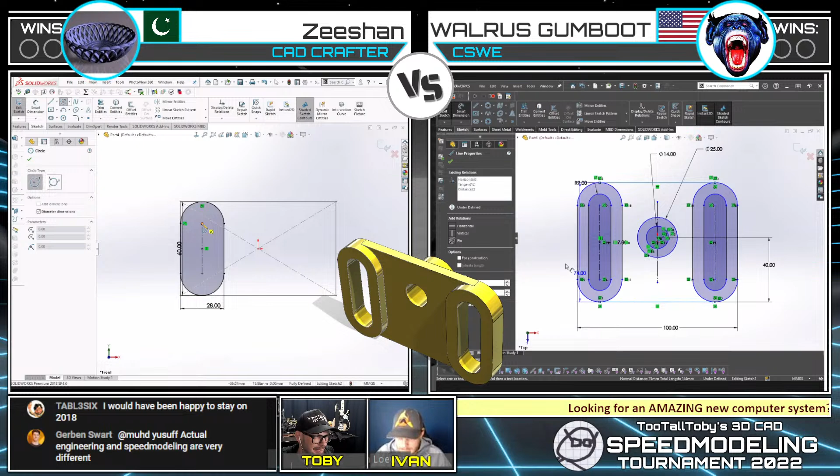That's right. Yeah. So we're gonna let Jed take a look at that. He might be using some exploits too, to try to get away with something. Yep, sometimes we try to get a little too clever, right?

Yep. So, looks like Gerben's coming in here answering Muhd's question: actual engineering and speed modeling are very different. Yeah, I think that's a good point.

I mean, I definitely try to say what we try to teach here at the TooTallToby YouTube channel is efficient modeling, how to efficiently use the tool. We want you to be able to focus on the engineering challenges and have the CAD come almost as second nature, and that's what you get to when you kind of go through and do these exercises over and over again.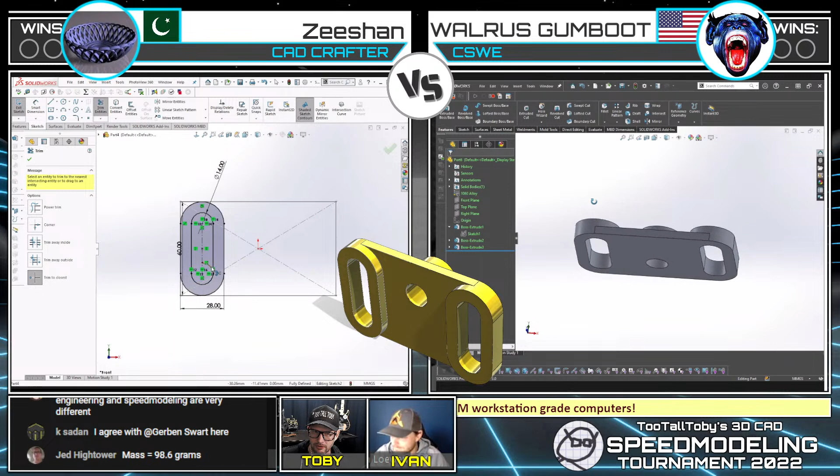And Walrus Gumboot coming in with the correct answer of 98.6 grams for dual plate, utilizing at least one Ivan exploit there, if not more than one. Very nicely done, Walrus Gumboot. You got it. You did it. That is the correct answer.

So very nicely done. If you guys want to give Jed a GG in the chat, that is going to give him the first win. Zeeshan, that first win is going to go to Walrus Gumboot, but it's not over yet. So congratulations to our competitor.

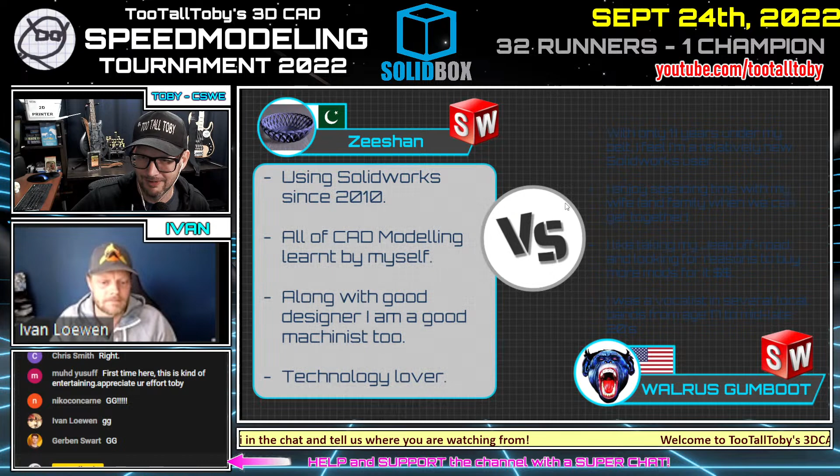That was an interesting one. It looked like Walrus Gumboot was able to get through that model pretty quickly, but it turned out there was a bit of an error, and that's the thing, is that when we're trying to teach this speed modeling, efficient modeling, it's not just about getting the model done quickly, but it's also got to be correct, right? Like that's kind of an important part of engineering. The models have to be correct.

Yeah. What do you think about that question from Muhd? He was asking, is it better to do the... I'm sorry, what did he say here? Is this kind of practice better than doing a complete machine assembly parts for professional? What do you think about that?

Yeah, no, I back you up on what you're saying, and I do a lot of work for manufacturing, and when I worked at a shop too, it's always got to be correct. But speed is an issue, and sometimes when the job has time constraints and you're working a plant shutdown on the weekend, you just got to get that part out, right? And so at that point, it doesn't matter how your feature manager tree looks. It's often a one-off part, so you don't have to really worry about downstream design changes or whatever necessarily in some scenarios. And so you want to do it as quick as you can. It always has to be correct, but time is money.

Yeah, I think that's a great way of saying it. And like I said earlier, it's really, we're trying to help you guys get on the path to mastery, right?

And that means learning the basics, the fundamentals, learning how to auto dimension, learning how to get your sketches created quickly, but still getting them accurate. Sometimes there's going to be spots where you just need to get that model out the door, and maybe you can come back later and refine the model and make it look pretty and usable for other people. But sometimes it's just a matter of if you can get it to that mold maker today, he can start the machines up and let them run over the weekend, and that can move up your delivery date by a few days or even a few weeks.

Yeah, yeah, exactly. Yeah, yep. All right, totally, cool. Well, let's get on with it then.

Let's take a look here at our competitor, Zeeshan. We mentioned before he learned CAD all by himself. He's, along with a good designer, he's also a good machinist, and he is a technology lover.

Yes, I like it. And WALRUS GUMBOOT says he likes taking his Jeep off-roading and looking for reasons to buy more mods for money. That's pretty cool, I like that. And he was a vocalist in several local bands from age 17 to his mid to late 20s. Nice, WALRUS GUMBOOT, love it. Wow, I grew up playing in bands too, so maybe we'll get together in our old age and make a collaboration on some kind of music project.

It often seems like there's a music link, I don't know if you've noticed that. Music and engineering, there's some common threads. Yes, I have noticed that, and I completely agree with you. There is definitely some common threads there.

All right, cool, well let's take a look at our challenge here. Potentially our last challenge, but I don't know - I'm rooting for Zeeshan too. I think Zeeshan's going to mount a comeback here. So let's see what happens.

And hold on one second, I always get worried that I'm going to flash the print too early. I think we're good, just got to get that confidence together, right? So all right, both of our competitors look like they're ready. We're going to have Zeeshan on the left, we're going to have WALRUS GUMBOOT on the right. And here we go, in 3, 2, 1, go.

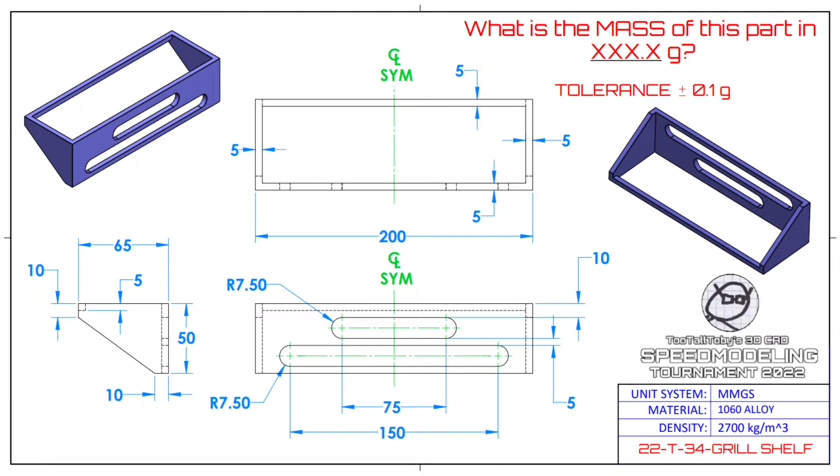I like it. This is a thin part, and you've got to think about that too. There's some ways to handle thin parts. I love sheet metal, I do a lot of sheet metal work—I'm not saying this is necessarily a sheet metal part, but yeah, good added challenge.

Well, I'm going to move over here to the side-by-side view. Hopefully that was enough time for Zeeshan to capture the print, and we'll hopefully see him start modeling here in a second. I'm not sure if the internet is going a little slower for him, but let's take a look.

Krishna says, great model. All right, awesome, I like that.

Niko Concarne says, my favorite quote of the day from the man who made the Ivan exploit: don't be sloppy. I see that too. Nice, I like it. I tell you, I'm honored to have an exploit named after me. I chuckled when I heard that the first time, and it may sound a little contradictory, but yeah, it's good.

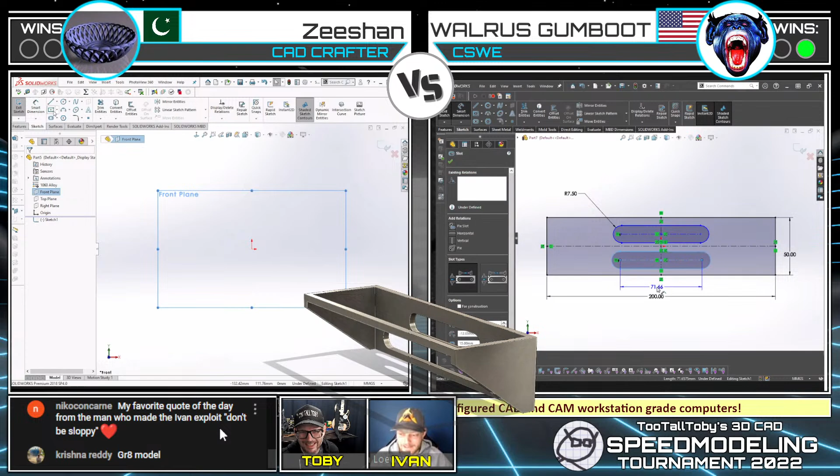Yeah, absolutely, we've got to have fun here too. You do a good job of this on this channel and on this tournament. It's just a ton of fun.

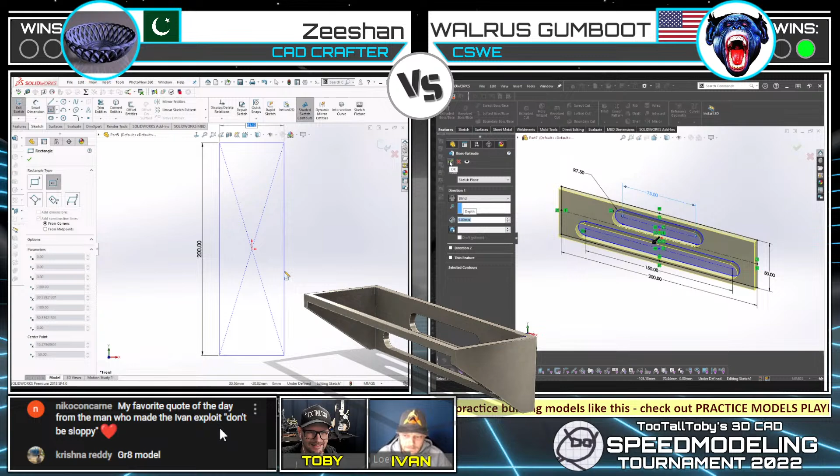I think it was Walrus—he said it was talking about spending time with his family. I forget who it was, but I hope they're watching this, because my family, I've got 4 kids, my wife and kids, and when I'm competing in a matchup they've got it streaming on the TV and watch it. Nice, and they love it. They're not familiar with how the tools work, but they love watching it. Oh, that's awesome.

So it looks like Walrus Gumboot took an approach of creating almost like that front plate to begin with, and now he's going to come down and create kind of the side wall. And Zeeshan, I believe, is doing more of a top-down approach, creating the model looking down from the top and getting those side walls in to begin with. So quite a different strategy from the two competitors, and that's what I like to see here on this tournament—seeing two different professional CAD users coming up with different approaches to create the same 3D model.

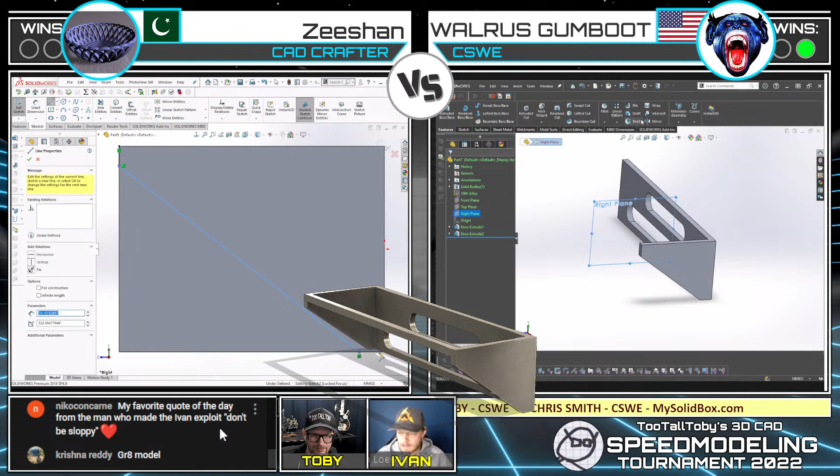Yeah, it's good. I think you often think about how to capture a main profile, or as many profiles as possible—can be good. And yeah, these guys are kind of started off from two different directions.

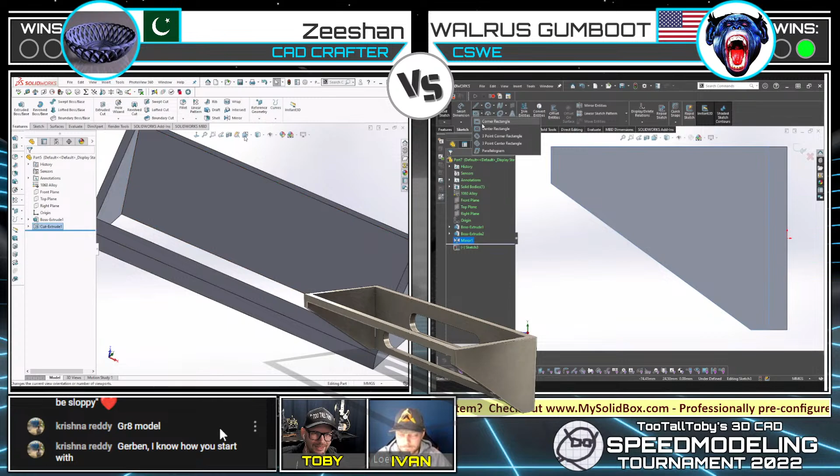And that looks like on the right there, Walrus Gumboot ran into that issue where you're trying to mirror, but you pick a face that's shared with an earlier feature. SolidWorks will always take the earliest feature in the tree in that scenario. That's something that when you become a pro, you start to learn—in that case, he would have had to pick maybe the angled face or that small face on the left side. But the other three faces wouldn't have worked because they were shared with that first boss extrude feature.

And we see these guys both have the auto dimension functionality turned on, but neither of them's really using it. I think that might just be tournament nerves. That's interesting—I've got that thing turned off, and I've tried to use it, but it's so out of my habit that I've got to keep it off. Oh man, me, I use it nonstop. I know, I see you use it and it looks good. It really does, but it's a tough one for me to learn.

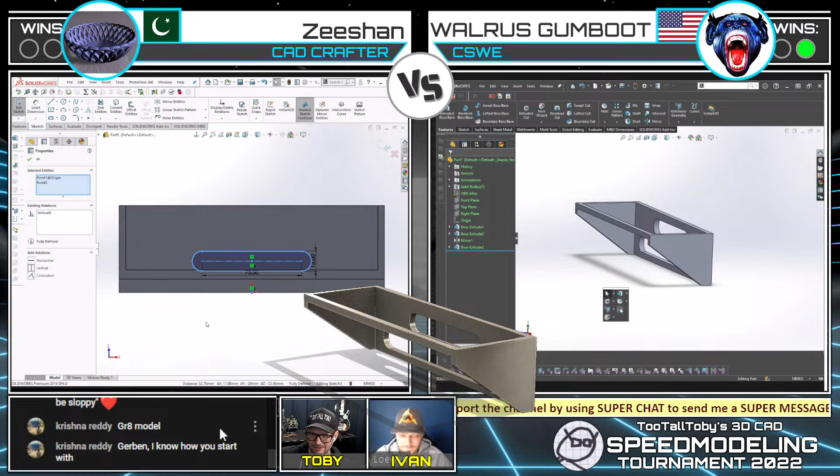Well, again, I like that user interface that Walrus Gumboot's got with that dark theme and the green text in the tree—that looks sharp. I think I might have to start using that too. It's very similar to the themes that I use on my channel.

Oh, and even revised to the desired precision there for that mass property. That was a flex for sure.

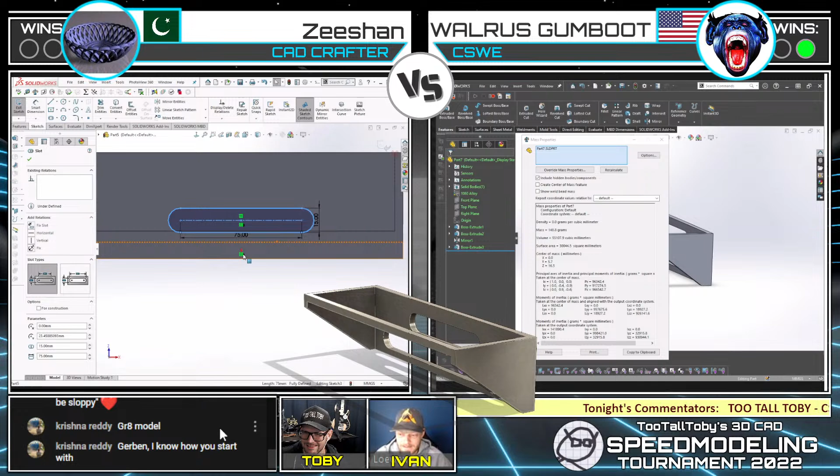All right, and Jed Hightower comes in with a mass of 148.8, and that is correct. And that will give Walrus Gumboot the second win, and he will move on to the round of 16. So congratulations to Walrus Gumboot.

Very nicely done. GG to all of our competitors today—that was a pretty intense matchup. Zeeshan, nicely done, nicely done. You're right there—just basically that one more feature, that cut extrude for those slots, and you would have gotten there. But very, very nicely done, and really nicely done to both of our competitors. Let's give them a GG in the chat.

I think this was an awesome set of matchups today. I'm excited that we now finished both the blue bracket and the black bracket. I think we got a really nice lineup going into our round of 16. So I'm excited to see where this all goes.

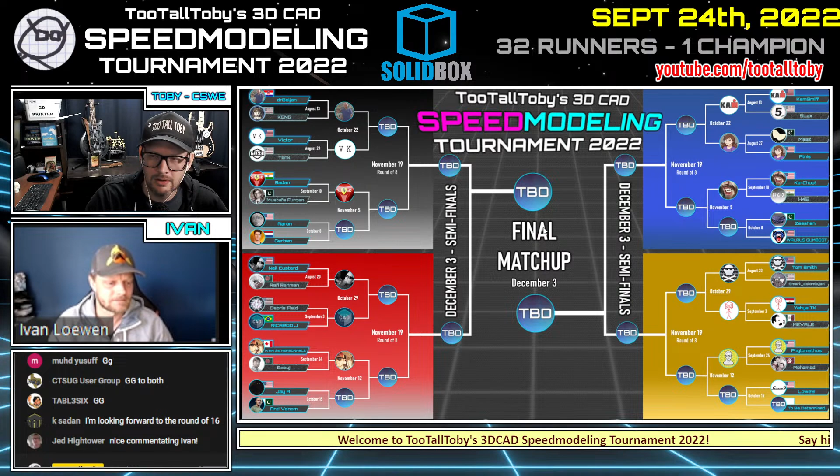Alrighty, man, so that's it. The blue bracket and the black bracket are now set. We're going into our round of 16 in both those brackets. Next week we're going to find out who advances in the red bracket, who's going to face Low. I think it's going to be Zackass who's going to go against Low, and who advances in that one goes on to face Philomathus, our old friend Nick. So congratulations to all our runners. Thank you so much to our four runners today, to Aaron, to Gerben, to Zeeshan, and to Walrus Gumboot.

Ivan, any final thoughts here as we wrap up? Not much, I just got to say that was a lot of fun to watch. Yeah, I often compete on the other side, but this was a nice low stress, just really enjoyed watching it. It was a lot of fun. It was great, yeah, it's a lot lower stress when you're not competing, that's for sure.